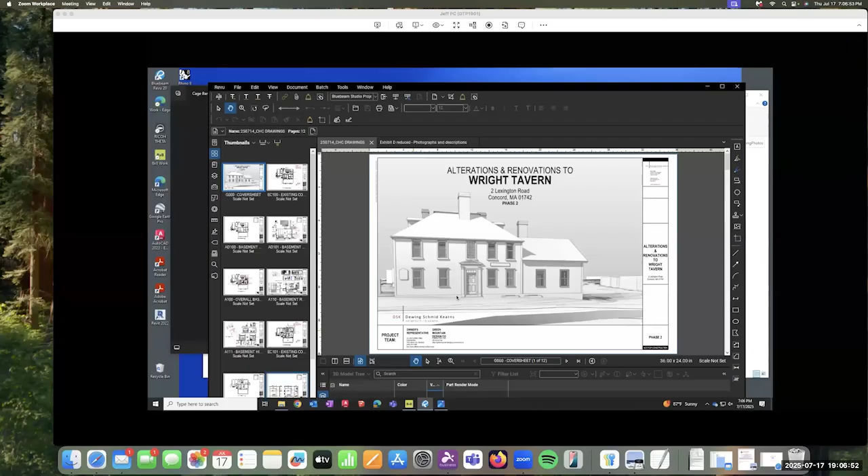Okay. Do I have permission to share my screen? Perfect, you do for me. And do you need to give him permission? No, you should be all set. Okay, yeah, cool, there we go. Okay great, awesome. Are you guys seeing this wonderful image of the Wright Tavern? Yep. Is it large enough for everybody to see? Should I zoom in? If you can make it full screen, I think that would be great. Maximize that window. That's, I can close this. Close the thumbnails. Is that better?

Not great. I think you can make it bigger. Can't he make it bigger? Instead of sharing your whole desktop, you could just share that application. How do I do that?

Stop sharing, and then when you go back to share, you'll see some options. One's a desktop, one's just the application, or if it's like a browser, you can open a specific tab. I see screens, documents, advanced. Documents, documents, it's alright. That's not showing me what I want to show you guys. You don't see applications or anything like that? I don't see applications here. I can scroll in and out, zoom in windows as we go through this. Oh, like in the middle, if you have screens, yep, if you have application windows.

Jeff, I think Bluebeam also has the presentation mode, look for it. Window, see if window... you know what, that's fine, for the sake of time that's fine.

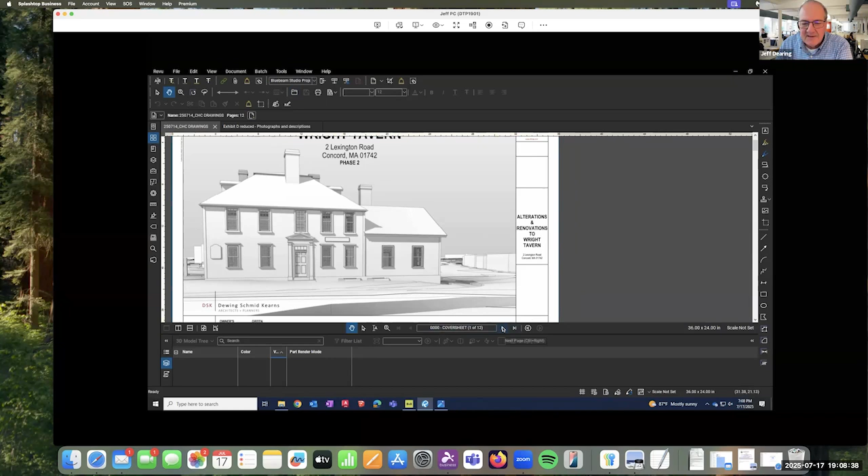Okay, so right there is the Lexington Road view perspective, and we're going to start down on the basement level. And just to orient everybody with the plan, the top side of the page is Lexington Road, the left side is Main Street.

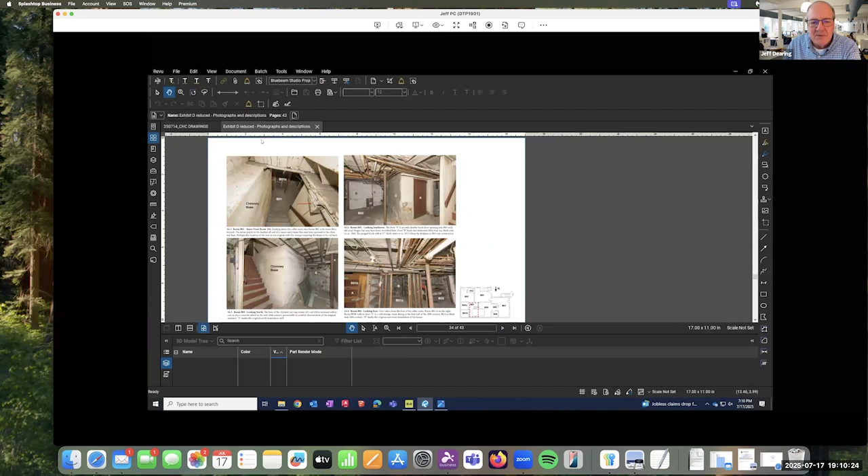What you're seeing, this is the door to the ice room. This is that partial partition with the metal mesh. Okay, and so this is where we're proposing to create a new space. And B2 is just, there was no names on the preservation document, but this is a storage area. And what you're seeing here with the door is the old bathroom that was here.

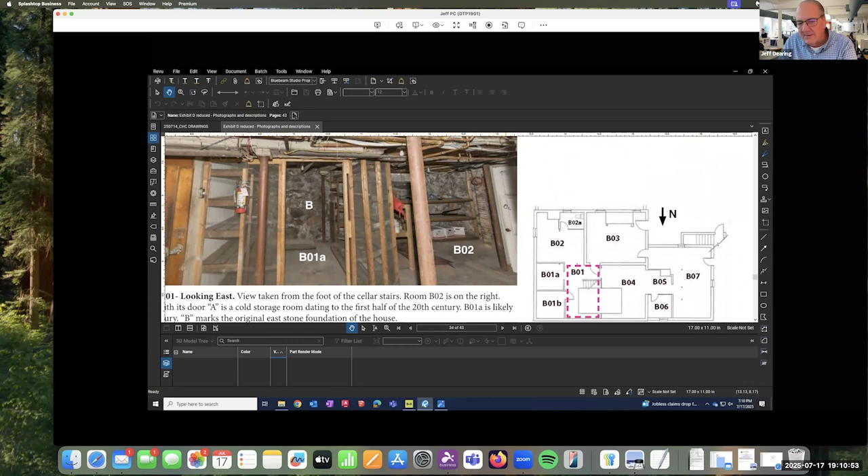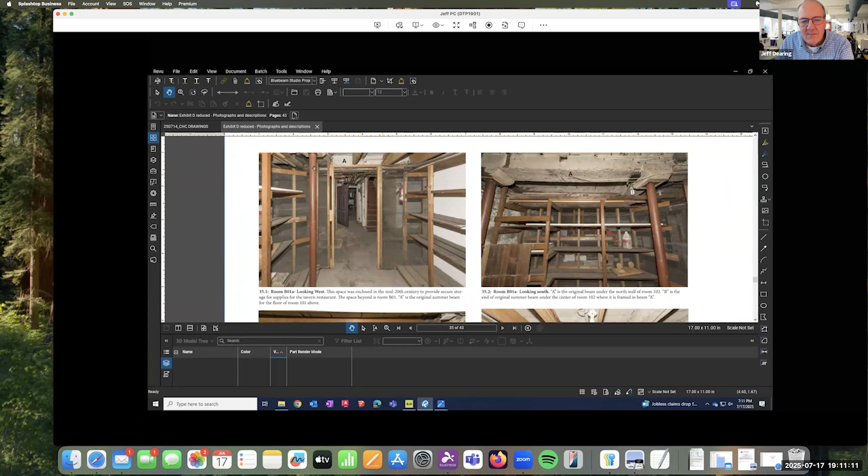This is a larger expanded view of... well, let me just. This is the interior of that secured storage area with the wire mesh and the wood. I believe this partition no longer exists, but the others on the left side do. And you can see it's just basic storage, timber structure with wood boards for shelving.

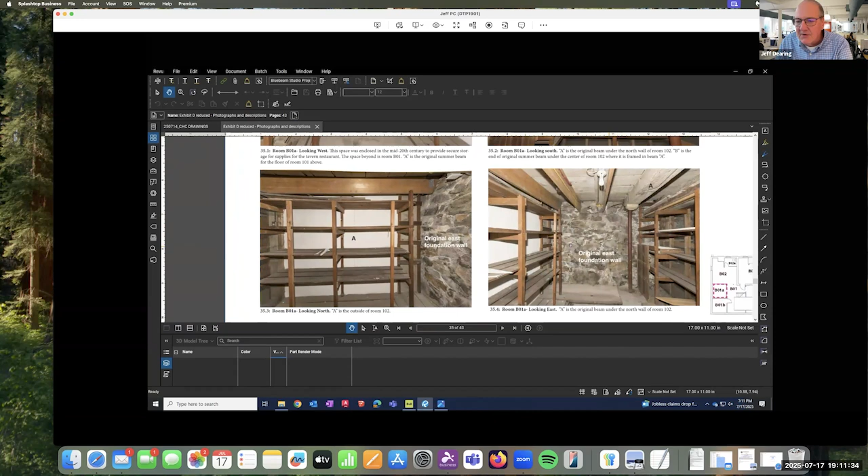And here's the opposite wall, and this is the back wall of that cold storage area. And then here's a good view looking directly in at that space toward the east. And the original stone foundation, one of the primary posts or support beams, that is original, and you can see the original decking above that.

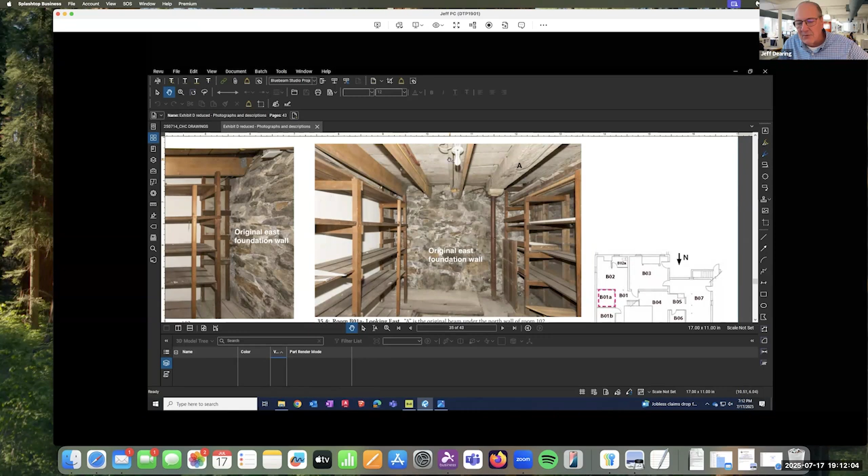What I'd also like to point out here is you can see one of the original joists here, and they have been sistered, is what it's called, where they apply a new structural member to give strength to that member that was not adequately supporting the floor. And so these have all been altered other than the primary beam.

This is that cold storage room. So again, you can see everything has already been lined. There are again some open shelves in here. Those will go.

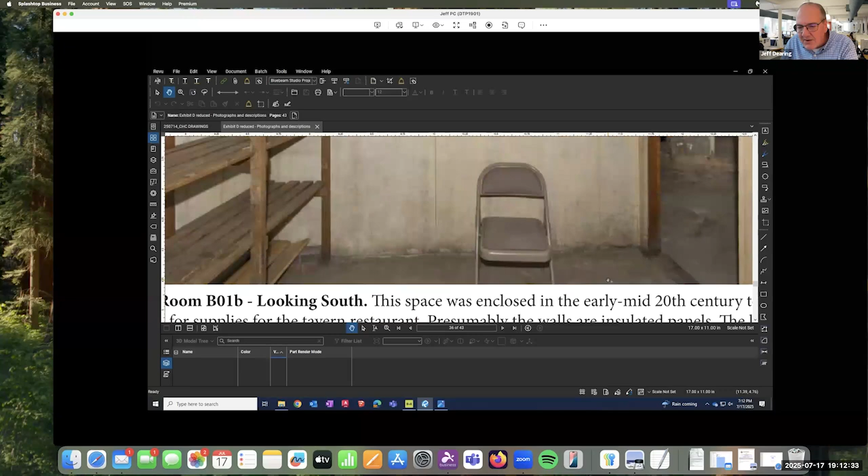And here's the corridor leading to that door. Then we're in a space with the door to your right. You can see the floor has infill on it, and all 4 walls already have a surface applied. We will be applying a ceiling above this so that anything above is isolated.

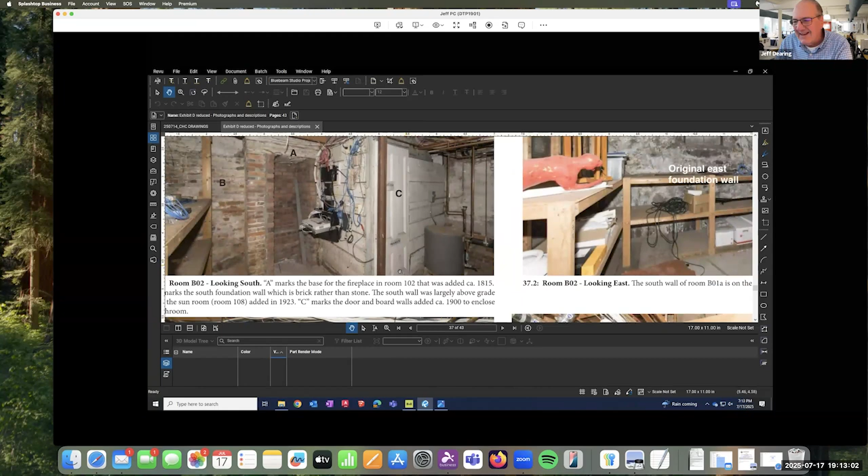Now we're going to get into the B2 and B2A. This is that bathroom, the B2A space. You can see it's horizontal boards, it's a door. It's also a raised floor, which you can't see. It's a wooden floor that's raised up about 5, maybe 6 inches.

And then here's our east exterior foundation wall. Again, you can see almost all of this structure has been sistered, so it's all been altered to some extent at this point. This is before the structural renovations. This was a parged brick. You can see a little bit of the brick here, and the wood post coming through. This has been removed for the most part and infilled with CMU.

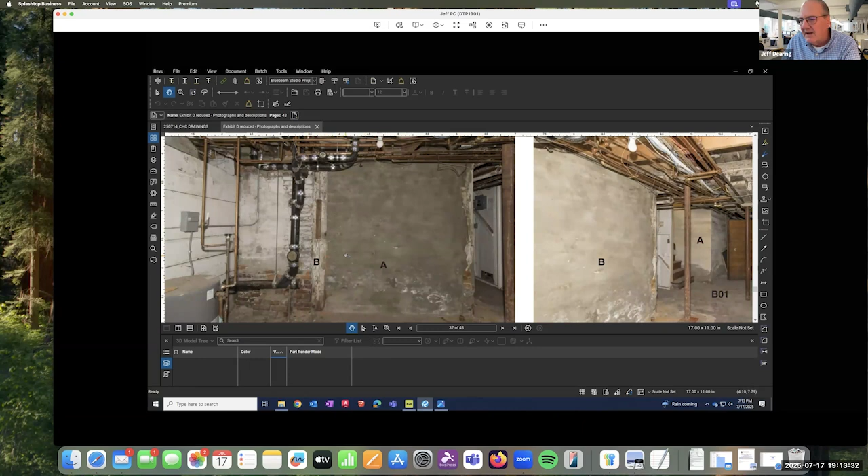The wood beams are still in place. They worked around the beams, so the original wood beams are still in place. And what's not real easy to see in these photos is the new lally columns or structural steel posts. There's a half dozen in this area.

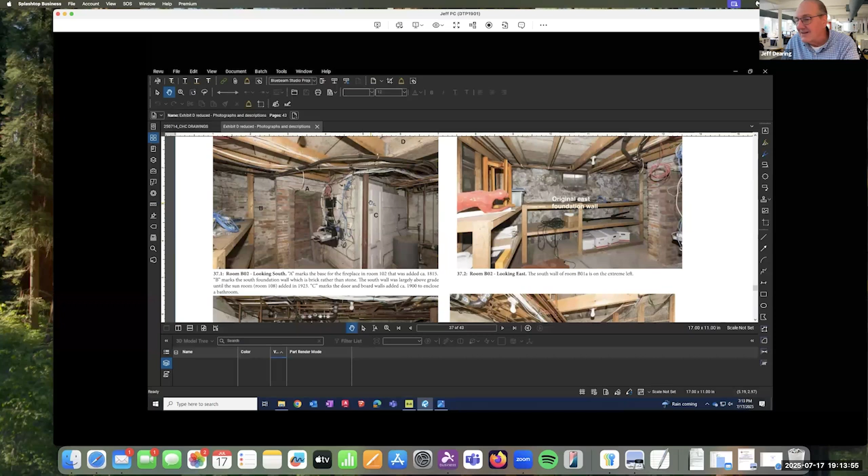So there's a background of reference, and now I'll walk you through what we're proposing for here. This is just a quick overview of everything, and we're showing the demo. This gets into the detail of that demo. Anything in these dashed red lines is what we're proposing to demolish.

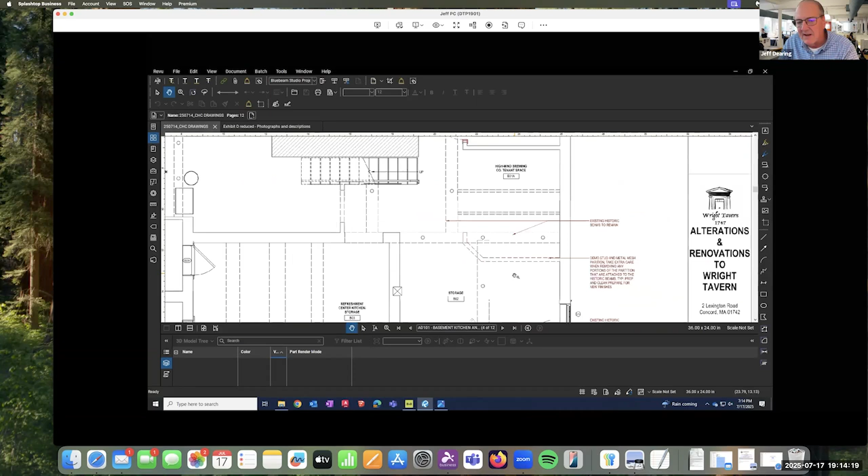This is that half wall or the partial wall with the wire mesh. This is that existing bathroom and floor. And though it isn't listed as historical, we're actually going the extra mile to be cautious about it and asking for that to be carefully disassembled and stored, just in case it could become useful at some other point, whether it's this project or somewhere else, because of the age of that wood.

And then in the existing B03 space, the former kitchen or bakery, there's extensive renovation work here. These beams were all reinforced. There's nothing to be demoed here other than there is a bench, it's casework. We're looking to remove that because we need to get in a grease trap. In order to do that, what we're looking to do is create an opening in this masonry wall to provide access for servicing that unit.

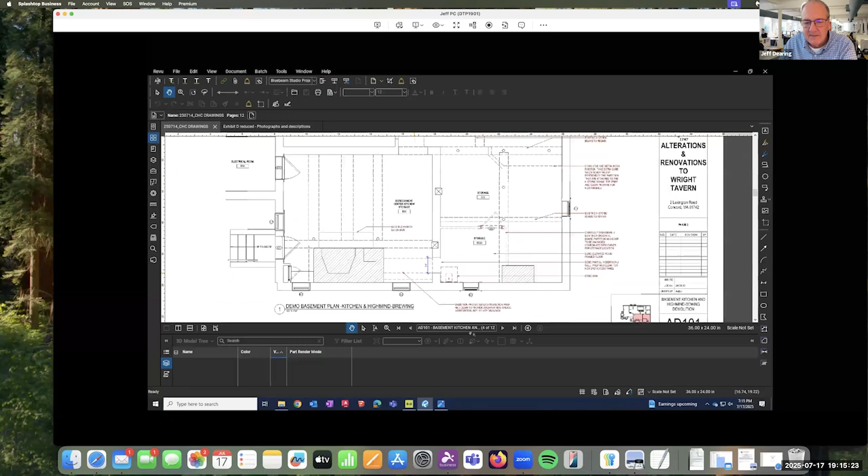And please stop me if you guys have questions along the way before I get too far along.

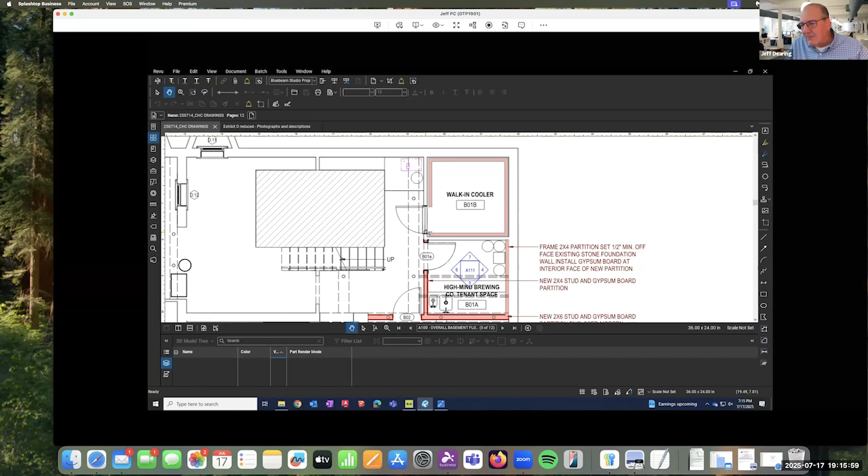Our proposed plan, starting in this upper corner, is we'd like to put in a modern walk-in cooler. These are prefabricated, custom-made to your space, modular sections. I can't remember whether it's a Z shape or a U shape that lock together, but they do floor, wall, and ceiling panels, with their own door. So we are looking to remove that existing door that's there, and again, out of caution and for the beauty of that door, we would ask for it to be carefully removed and stored.

You may want to chat with JC briefly about this, but we are looking to create a space for a microbrew here in support of the beverage center and the use of the tavern by its nature. What we're proposing is a traditional wood stud wall, 2x4 here, 2x4 there. The 2x4 against the existing foundation, we would hold off of that foundation so it doesn't actually touch it. This will wind up being a 2x6 wall because of the new steel columns that have been put in place, and to get around that with the wall, we need a 2x6 wall.

So we've got a new door, and this storage space would continue that same use, and we'd actually create a closed, secure storage area where the old bathroom was. That's just a simple reconstruction of those walls in place.

And the former bakery becomes a support for the refreshment center. There will be no food production down here. This is cleanup and support for what we need to do for the refreshment center on the first floor.

Again, in terms of preservation, we're looking at adding a new wall face here, held off the masonry by a 1/4 inch to a 1/2 inch minimum. Couple reasons for this: one, Board of Health is going to require us to close up that fireplace opening, and same with the baker's oven, but they will be preserved. We would hold that off that distance and then sheathe it, and do a backer rod and caulk at that final connection to seal the joint for insects, mice, etc.

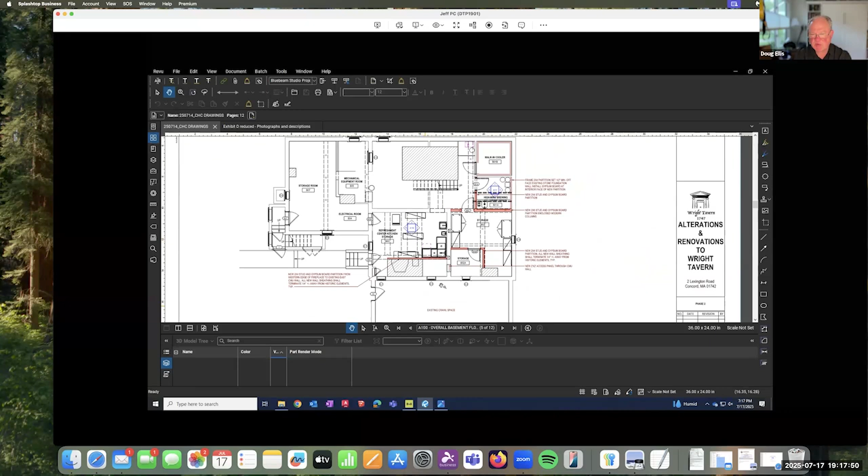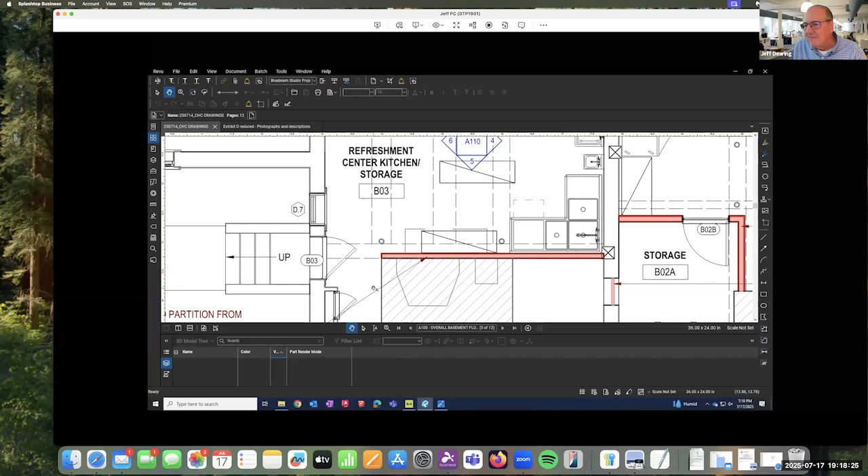When you mean you're sealing it off, but you're preserving it, does that mean you're drywalling over the whole thing? On two faces, right? The room side face and this very end, and potentially on this inside face where we're looking to add the grease trap. Yeah, and then there'd be about a 1/4 inch gap from the end of that wall to the face of the masonry. We would simply use what's called a backer rod—it's like a foam round rod that they stick in, and it provides a backer for caulk, so the caulk has a place to stop and expand properly and attach to its left and right sides. So the only physical contact here is the caulk. Okay, but the structure won't be visible any longer. No, it will be covered.

I think, no, I've got 3Ds and everything. All right, here we get a little fun.

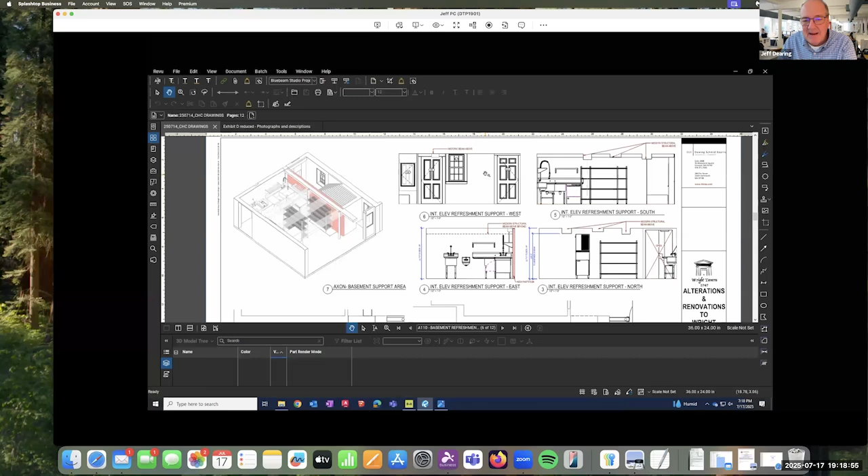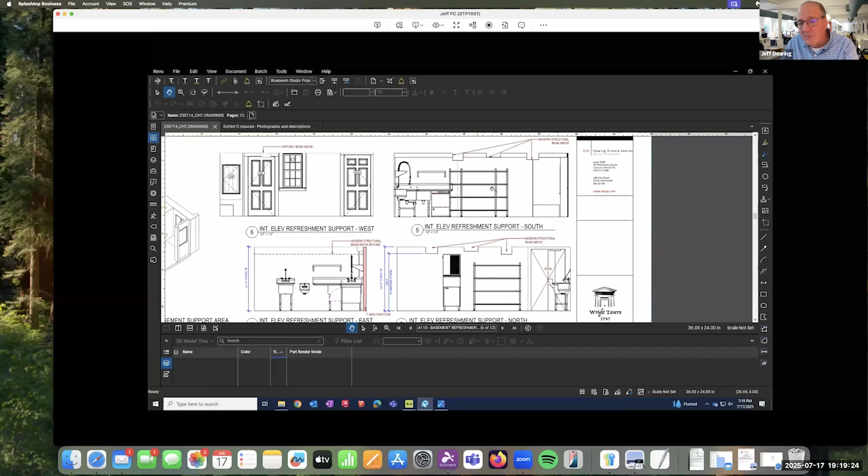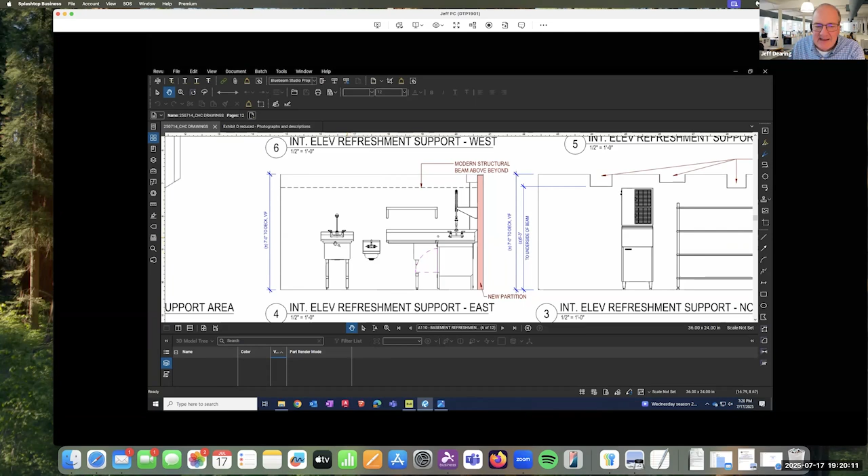Continuing on, we're now looking to the east, toward that storage side. Here again is that second portion of the L of that 3-bay sink. This is the CMU wall—we may have to paint or seal it for Board of Health. I'll let you know, we have not been to Board of Health yet. We've been trying to get this tightened up with our MEP engineers to make sure we had enough documented to accurately show it to you folks, and then we'll meet with Board of Health. But then we have a hand sink and a janitor's mop sink here. Then the wall now to the north looking to Lexington Road, there's an ice maker here, freestanding or rolling shelves, and this is the opening from this room out to that corridor.

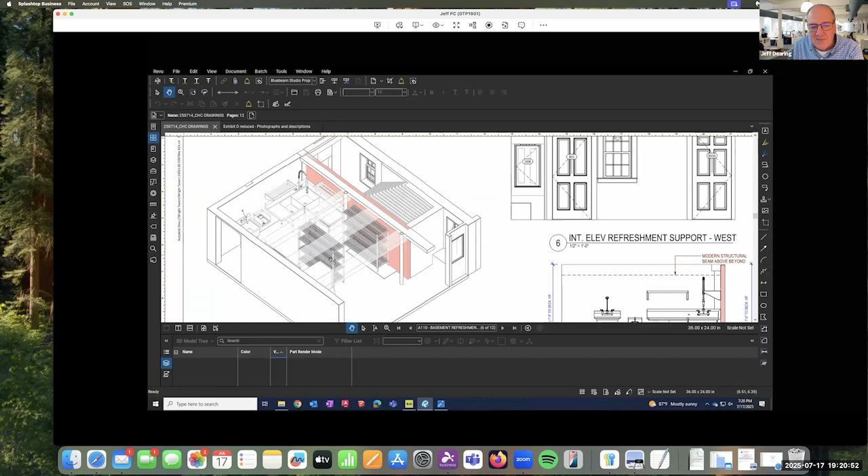And then a little isometric of that, to give you a sense of understanding that space instead of flat elevations. This is that beautiful masonry of that chimney that we're no longer going to see, but it's going to be preserved. Here's that L-shaped 3-bay sink and the other sinks, and then these little racks for storage, and these are the movable storage racks and the ice maker.

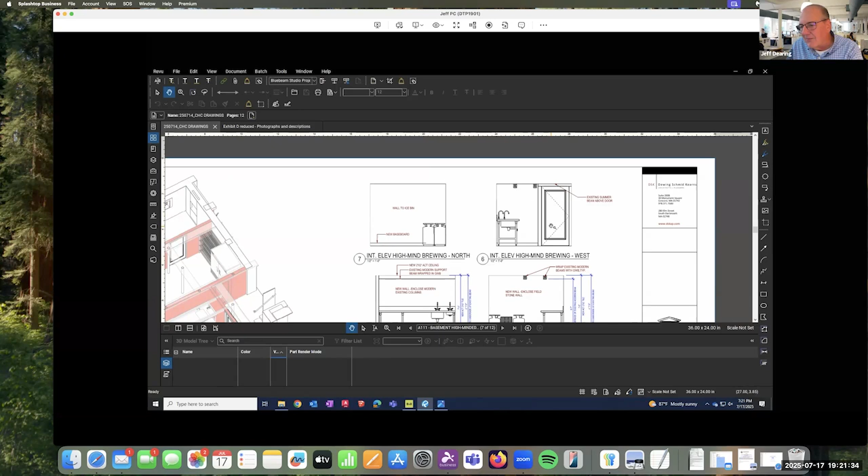On our next sheet, now we're moving in toward the maker space, the High-Minded Brewing area. It's a very simple room. The north wall that abuts the ice is just going to get finished with wallboard and whatever is required by Board of Health—some equipment gets stored there. This is the new wall looking to the west, our means of entrance and exit from this little room, and we're envisioning this being a glass panel just to borrow light and not have this space feel so closed.

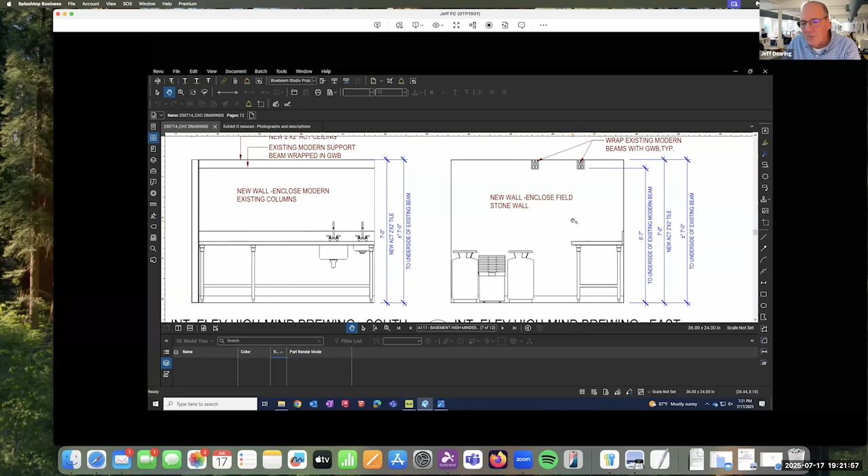Then on our south wall, again looking now toward the tea room, this is where most of the equipment is—stainless steel work surface and sinks. And then on the east wall, this is that wall that sits in front of the stone wall. We would have the wall in there, and then we would have equipment along that, and to give you a sense of what that looks like.

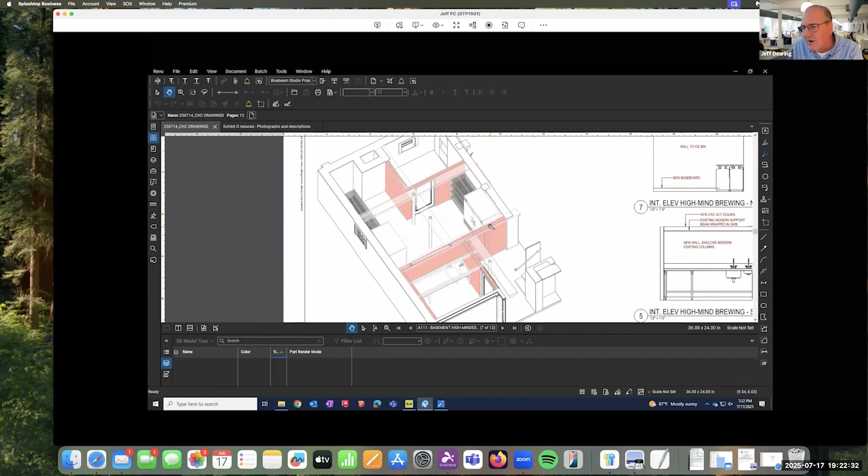So this doesn't quite support the High-Mind Brewing stuff, this is more about that storage area. This is the new walls for where the bathroom was, this is that storage area, this is the wall along one of the main beams with the new structural support columns, and this is the entrance to the High-Mind Brewing and the work table there.

And these are just floor plans that kind of support what I've already walked you through. And that's what I have for the basement. Do we want to tackle questions, or do we want to continue on and then hit questions?

Say continue on. Okay, so our first floor plan, again, Lexington Road is to the top of the page, Main Street is to the left of the page, and we're using the same graphics to represent the preservation document, the orange being considered modern walls and anything in teal being considered significant and or original.

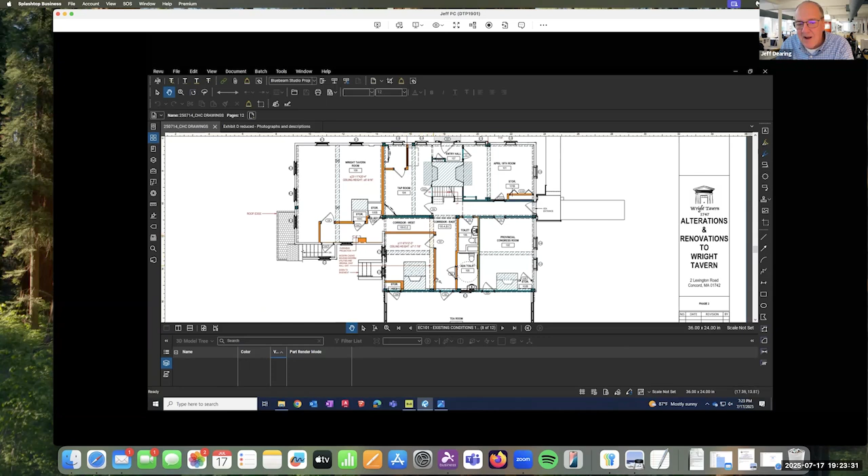And just to orient us, this is the space we are mostly going to be talking about. So you can see here, modern wall, modern wall. There's a modern intervention over this beam, and we have a modern wall to create the closet that services the tea room.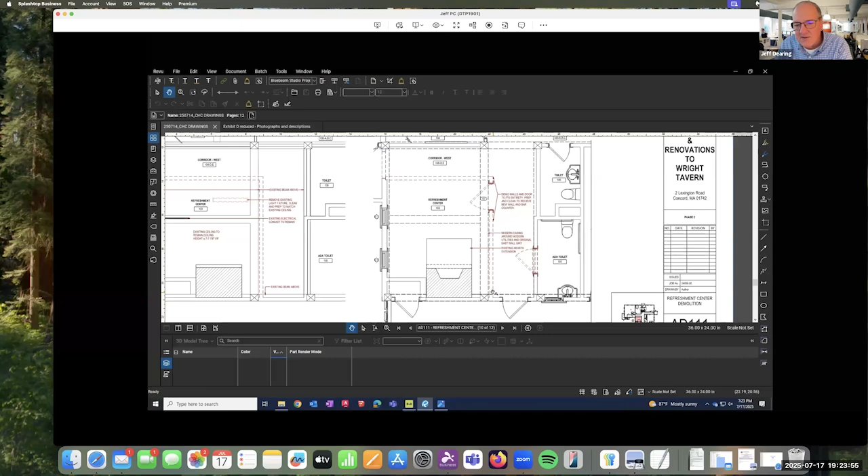I'm just going to move to the more detailed demo plan here. So in terms of demolition, our plan is to demo all of the modern walls, and potentially change out this door if we can make it work with ADA to have it swing into the room instead of into the corridor. That's also a modern door.

So in terms of what we're proposing, new partition really is limited to this closet and this little wing wall. Everything else that we're proposing really is casework or millwork.

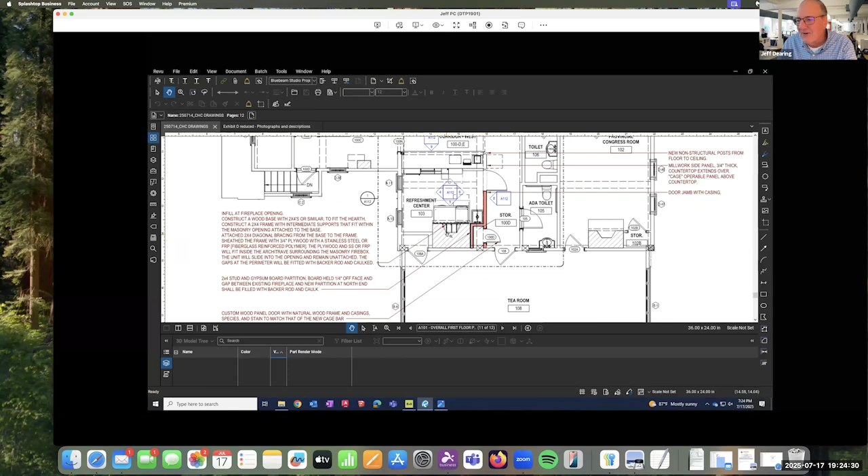We also have to address the firebox, and we're trying to be creative with that as well. We don't want to attach anything in here. That's original firebox, that's original hearth.

Our goal is to create a very simple framework, a floor plate network that follows the profile of that firebox, a vertical stud that infills that fireplace opening, and then some sloped bracing back to give it support. But the weight of this alone, we think we can just slide into place and it will be stable.

And then over the studs, we'd run a layer of plywood and then a finish material, whether that's stainless steel or an FRP, still to be determined as we work through our finishes with Board of Health.

We also have a power requirement in this location, since the manufacturer's cord on the unit is only a certain length, and they don't allow extension cords on it. So we have to get something here.

Our thought is to come out of this wall with electrical metal conduit, come out and across the face at around just 32 to 34 inches, so it's hidden really by the equipment. Nothing would be attached to the masonry.

We would then turn into this fabricated structure, add an electric box that is flush at the right height that they can then plug that unit into.

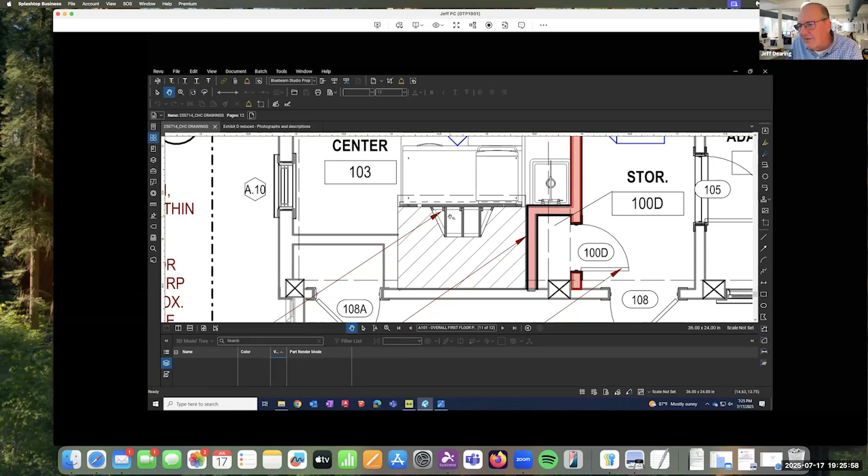Jeff, one thing just to point out: what we're covering up is only the firebox. The cabinet that is above the firebox and the mantle that's there now will remain and will be open. Correct, and you'll see that in one of the images we have in the drawings.

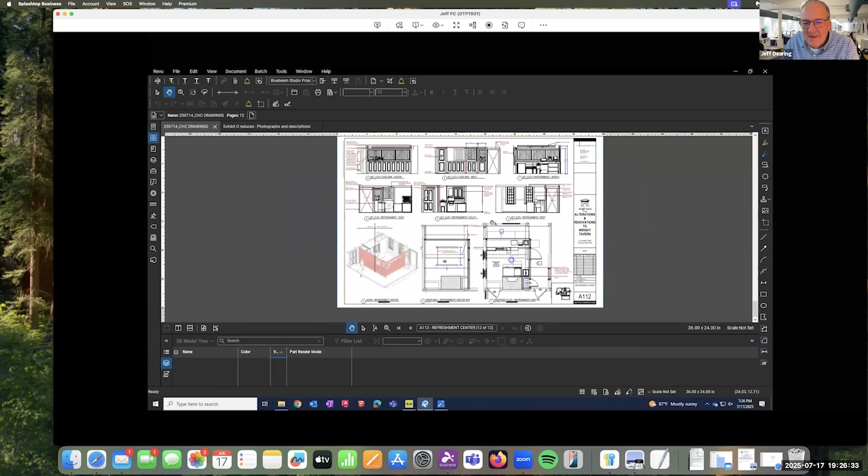Yep, so here we go, here are the fun drawings. Actually, I'm going to orient us first a little bit here. So what you're going to see on these first two images are the outside views from the hallway or corridors, looking back at this proposed refreshment center. This first one's taken in this corridor on the north side, looking south. The other one's taken on the east corridor, looking west.

So the concept is a cage bar. And the other concept is that this would all be made from reclaimed wood of an appropriate species. We're thinking pine, but we would try to match, and we'd use the tap room as a source for matching those species. This would be distressed, not premium wood. And the goal of this is not so much the aesthetic, but there's a real requirement here.

This space will now be used for more than just the tavern. There are tenants in the space, tours going on, visitors coming here, and we need to be able to close this and have some security to it. But we also need it to be able to be really opened up for service. So that's the reason for utilizing the cage bar.

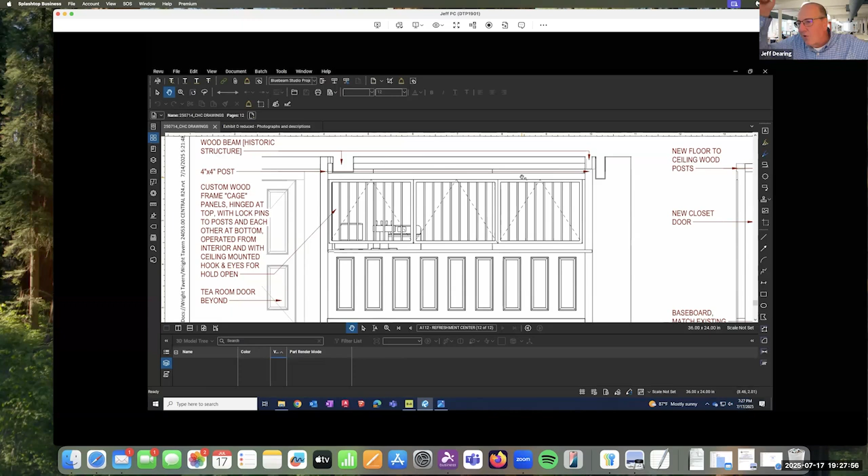On this wall, we're looking at three panels, and they would hinge along the top, using a simple hook and eye to hold them in place while open for operation. Here's a quick photo reference of that. If you haven't seen it yet, this is the little cage bar that was constructed for the April 19th ceremonies. You can see that cage in the open position.

Another interesting feature here to focus on is this door. It's a Dutch style door. So again, that cage can open and the door remains shut while service is happening. We're looking to utilize all of those examples.

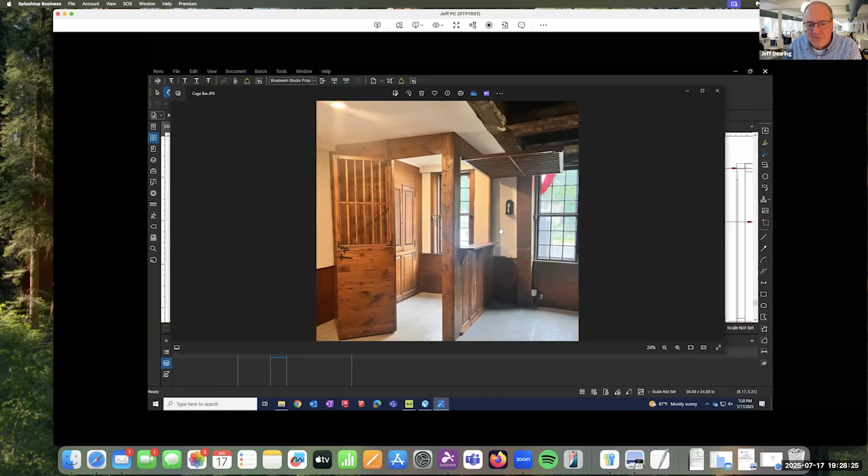And then it's all wood panels here. The language of those panels, the dimensions, will be derived from the dimensions we find in the tap room, so we have consistency of that language.

Now here is our west wall. This is the corridor heading down to the tea room, with the tea room here on your left. This is the new door for our little storage closet. We've done a paneled wood wainscot, and then this is just a continuous jamb that our door is attached to. These are freestanding wood posts, and then all the casework for the bar.

You can see our hinge marks here. This would open up. We've got the Dutch style door where it either opens all at once, or we can open just the top, which lets you operate the bottom door with good visibility.

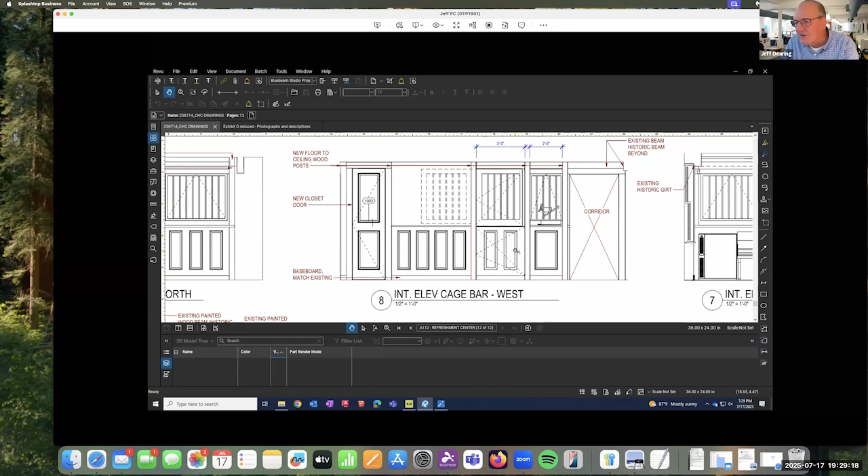Now we're going to move to the interior of that cage bar. Here we are in the operator zone looking out at the customers in that corridor on the north side. You're seeing all the equipment below, as well as what you'd see on the countertop: our taps, our point of sale machine, and I think this is a display for food.

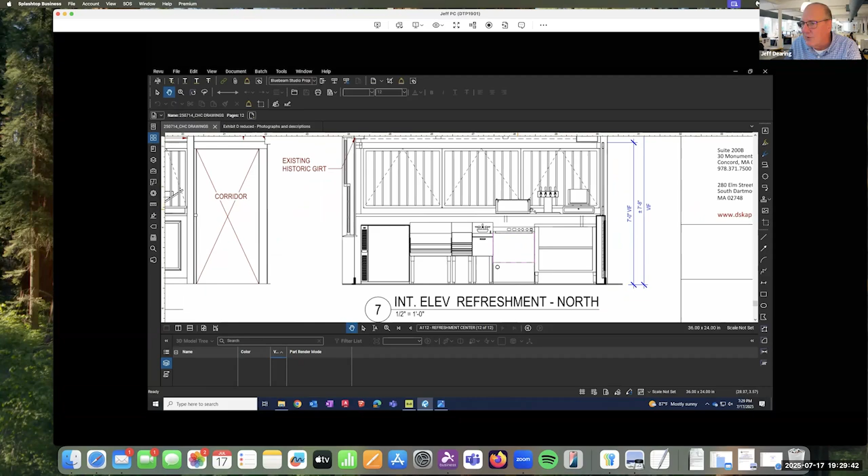The next image is now turning and looking back toward that corridor that leads to the tea room. It's somewhat of a section cut through here, and you can see we've got a wood structure here that we can hinge, which would free span across. It may need to be supported, but this is in the area where we're demoing a wall and would utilize spots that already had attachment points for attaching and supporting this.

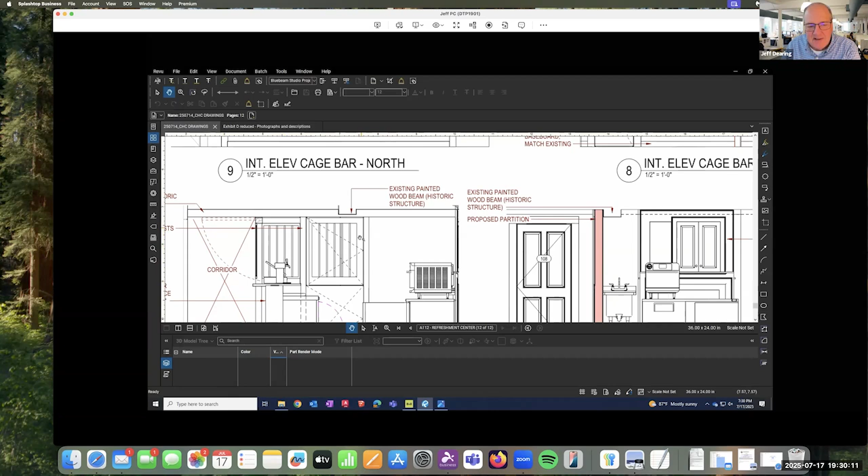That would hinge up. You're seeing that Dutch door again from the inside, and then kind of a profile of the bar and the equipment. On the opposite side, you're seeing some of that equipment we talked about that needed the cord for power.

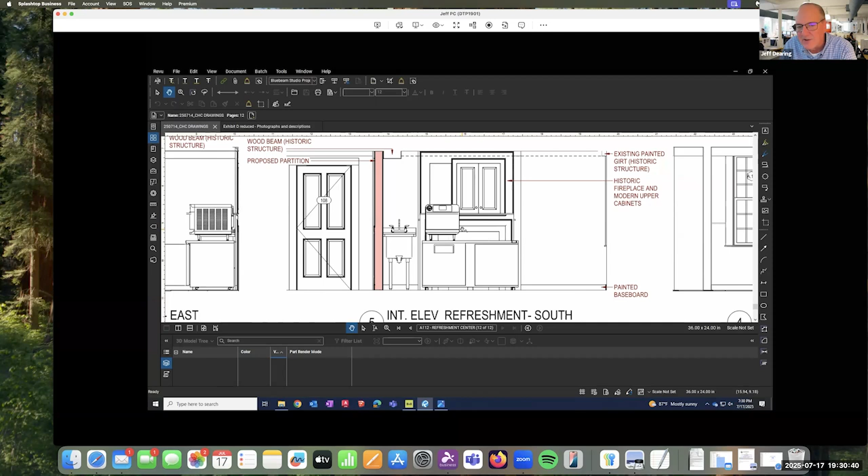This talks to Tom's point he just made about that existing fireplace. So that's what you're seeing here, the existing fireplace. This is the infill panel, but this is the architrave around it that's fully preserved and untouched. There's a mix of what is original and what has been modified in this space. The goal is to leave it alone, let it be. It is what it is, and it's a nice presentation in this use.

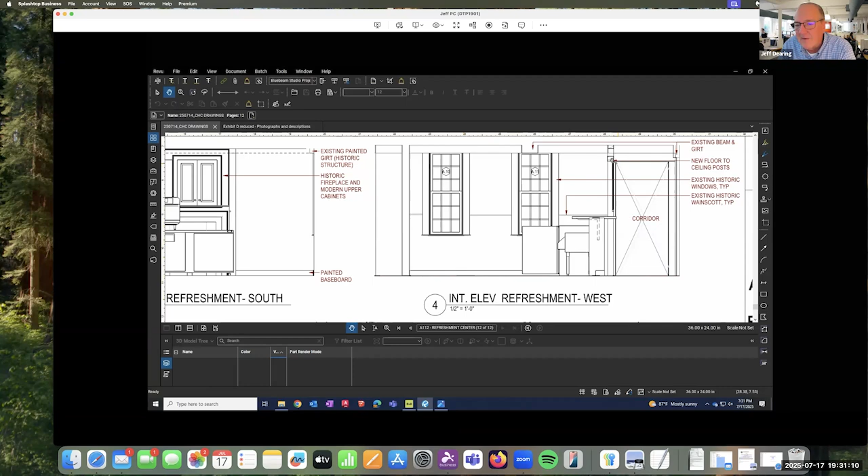Now here we are looking at the exterior wall toward Main Street, the existing windows. There is a wood wainscot here; we will not be touching that. We have another freestanding post against the wall where that modern partition is. All of this will die into that and support it.

And I think what I forgot to take you through is the preservation documents, so let me go back to that.

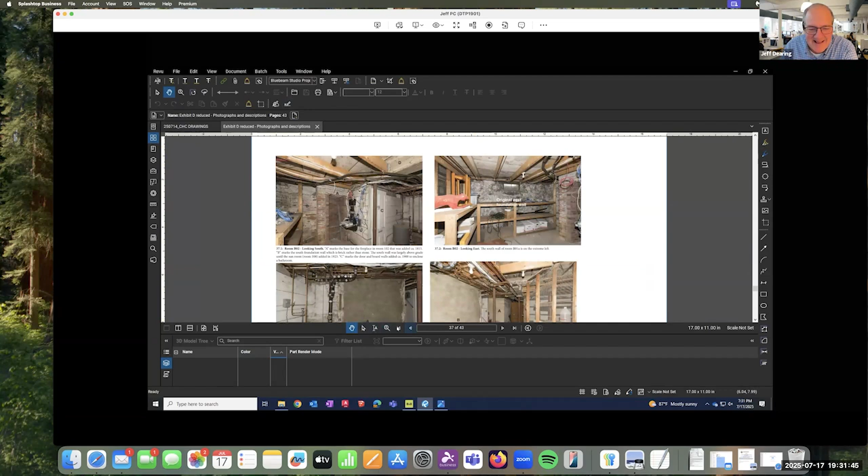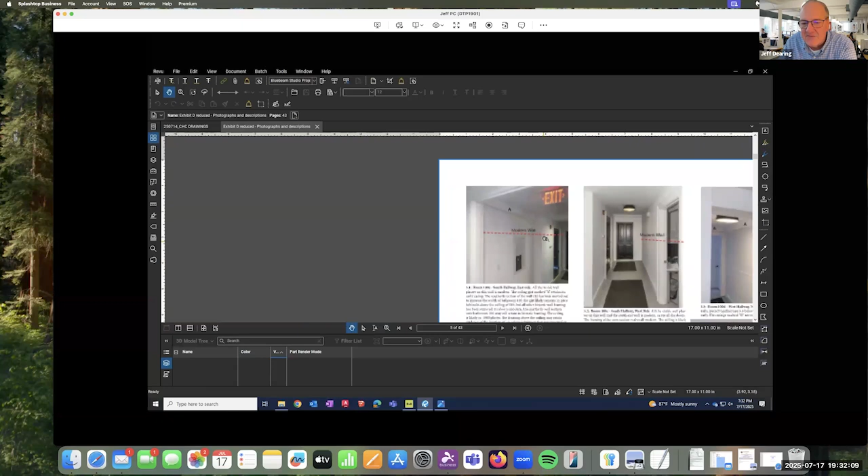Okay, these are really challenging to read until you orient yourself. What we're looking at is A100C, the hallway that leads to the tea room, and 100D leads to the L. As we go through that, this very first one is in that first corridor that leads to the tea room. That is the tea room door down at the end, and this is that bathroom door.

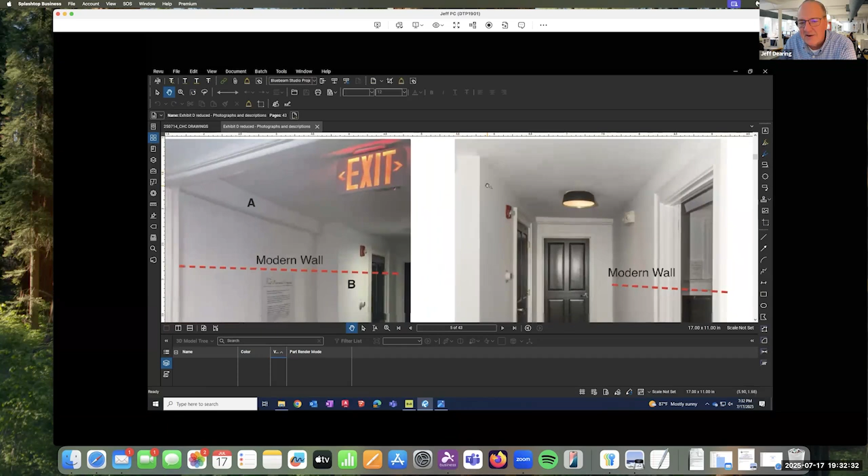There is a shift in the wall here, and you do see one of the original girts coming through. This is a straight-on shot where you still see that door. What you can't see is it was taken right at the face of that notch. You can just get a little sense of that girt coming in here for reference. And then this is the door to the current 103 space.

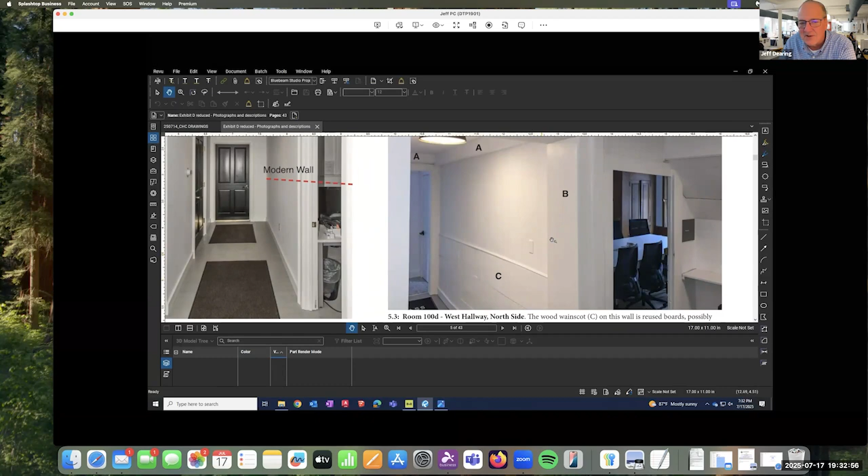This area is the actual opening of that corridor to the L. There's existing casing here as well as the beams that tie in at that location. This will not be touched.

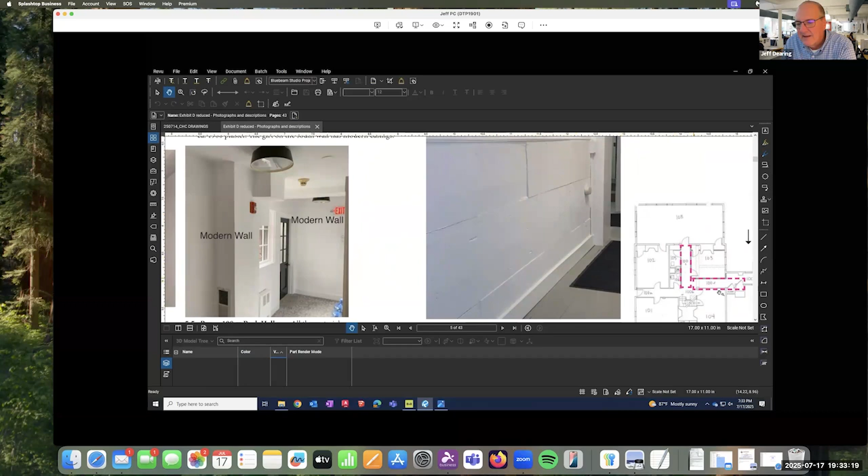And the last one is looking back again at that north side, this wall of that hallway, and you can see how pieced the wainscoting is.

That's our presentation. We look forward to your comments, questions.

I think this helps me understanding about 75%, just getting my orientation on north, south, east, west, which, a lot. Getting the three-dimensional perspective is challenging.

I think you mentioned there would be ideally a walking tour of this with the commission. We would be happy to do that with the drawings so that you can have them in your hands and orient yourself in those spaces, and we do a Q&A as we go through.

Lauren, I see your hand is raised. Yes, thank you, and thank you for this great presentation. I just love this project and I'm so grateful for all the care and great work that your team is doing. So, thank you for that.

I have two questions. One relates to the covering on the chimney in the basement. Is there any concern about mitigating moisture down there, or do you think that's going to be not an issue?

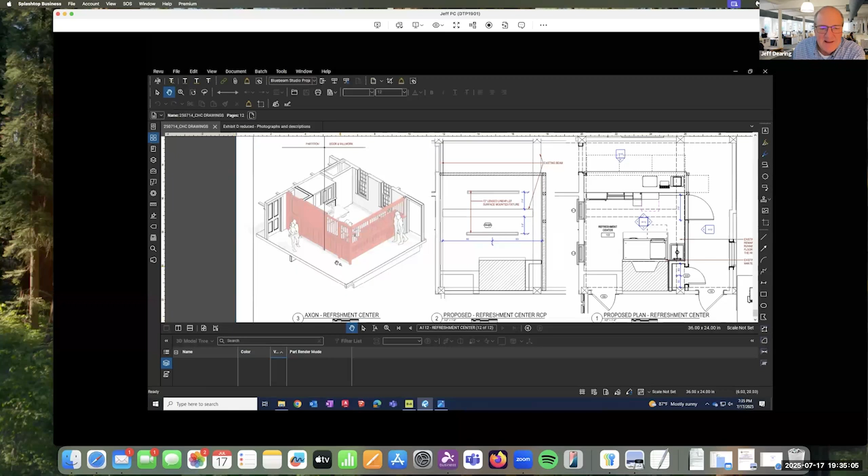I think it is what it is. That chimney has its board form concrete around it. I don't know exactly when that was done. Tom, was that work done with the structural renovations or prior to? The original chimney base in the basement. Yeah, it was done before the structural work, probably maybe 30 to 50 years ago. Hard to know exactly.

That would make sense with that kind of construction. In terms of water intrusion, we don't want to seal that stone. If we did anything, it would be at the perimeter at the foundation slab to manage the water and not try to seal it. I totally get that. Okay, thank you.

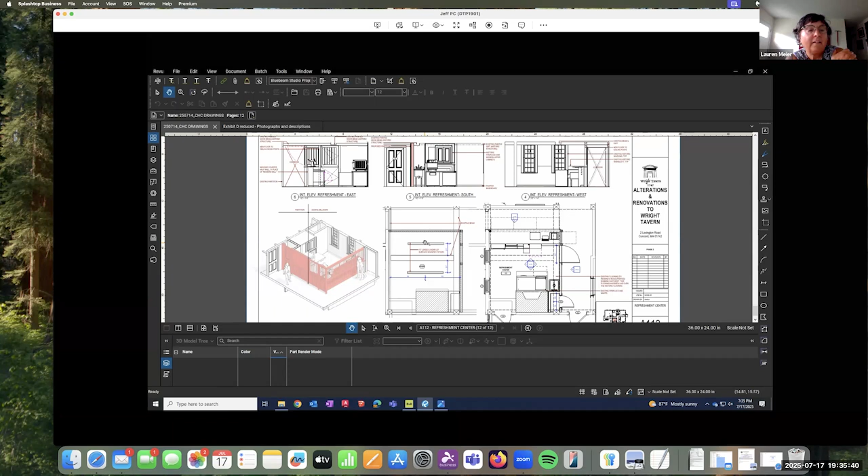Then my next question is a little bit more challenging, and it relates to the design of the panels and the cage that you just talked about. One of the things in preservation, the Secretary of the Interior standards, do talk about new work being compatible but distinguishable. And this is beautiful—it's going to look beautiful with the other historic features, but it does give me pause. It's a challenge because you want it to look all part of a single thing, but on the other hand, from a preservation point of view, it needs to read as a modern intervention.

I don't, I hadn't thought about that question, and it's a great question. Thank you for that. It's definitely something for us to consider.

How would the board feel if we kind of kept the aesthetic, but this was a painted versus natural wood? Would that get to your concerns?

For me personally, I think that's the kind of thing you might think about, which is making it distinguishable from the original in some way. Oftentimes it's the same design, but it's a change in materials, something so that it fits. But I'd pitch it to my other commissioners, but I just thought I'd raise that issue relative to the Secretary standards.

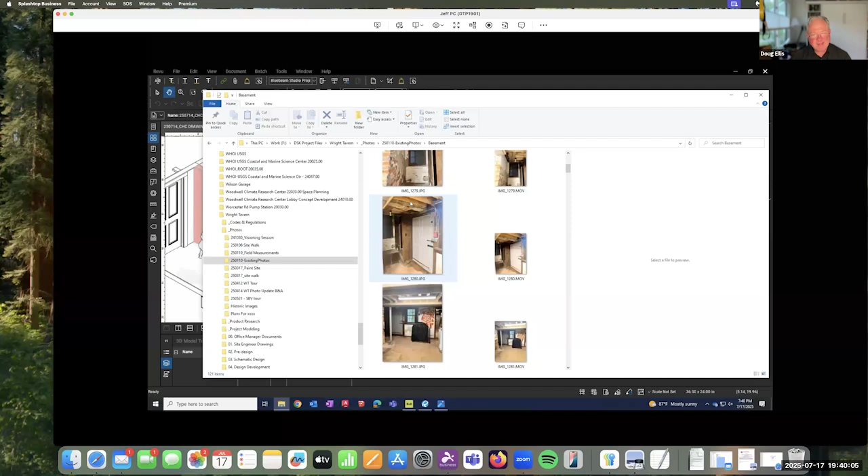I have another question - but the fireplace in the basement, hasn't it been painted? Yes. Would you like to see an image of that? It's a beautiful room, and the artwork remains - I think it's from the First Parish. So would you be removing that?

We wouldn't touch it. We would simply put this wall in front of it and leave it as is. Our concern with trying to remove paint off old brick like that is that we would do more damage than good. It's apropos of another building going on in town.

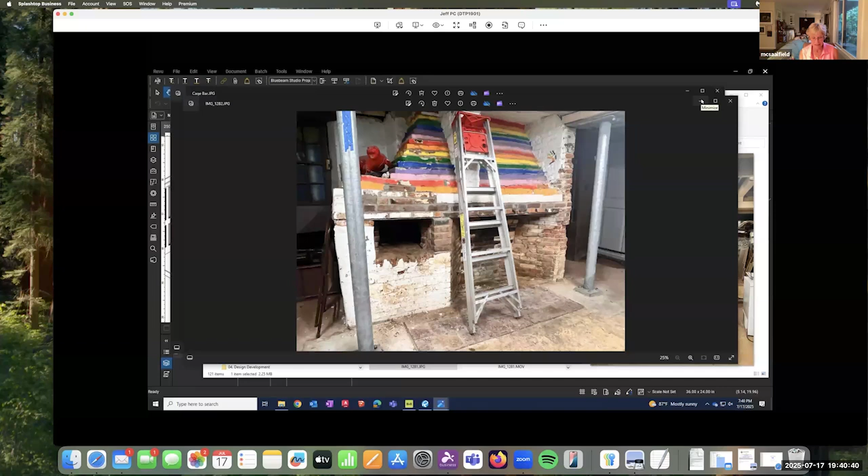At any rate, the things about plumbing and electrical upgrades, I would probably defer to you and Lauren, but will that be too disruptive to upgrade service and plumbing to support this new refreshment center? We went through a ton of gymnastics with our MEP engineer to accomplish their needs to do this while being respectful of the structure.

They came up with something completely different. We're like, nope, can't do that. We walked them through it, and we had a full hour plus meeting just identifying what our options were. And they did a full redesign. That's part of the reason you got a late submission with the revisions - we had gone through that exercise, so what we're showing you, we're pretty confident we can do, and that'll meet the health department's standards.

That was one of the critical things - we're trying to find that famous knothole between what the health department needs and preserving what's there, while also being functional so it will support what we're trying to do with the space itself.

Another question, Tom - what are you thinking for hours of operation? It's a great question. So what we're thinking is to have it be a museum, I'll say from 10 or 11 in the morning till, let's say 4 o'clock. That would be, you come in, you pay $10, you come in, you walk around.

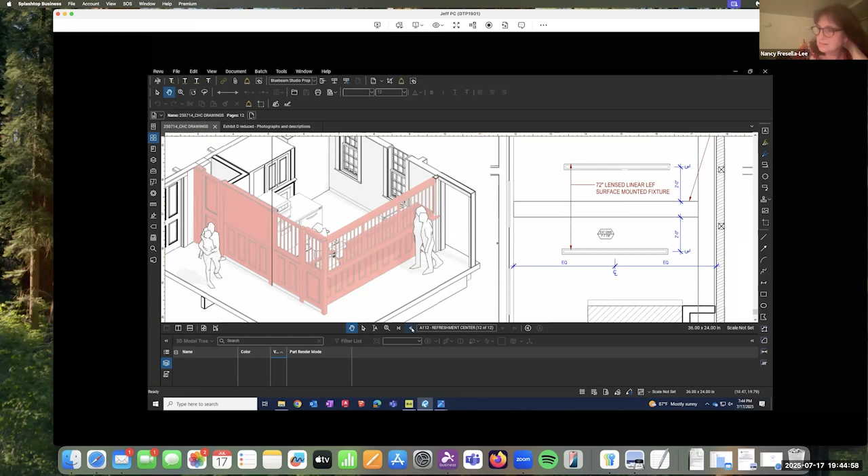Yeah, you showed where the microbrewery was going to be in the basement. Just a basic question — that's to hold the beer that's going to be pumped upstairs, right? That's to produce it — you're going to make beer there. We're gonna brew it. You're going to brew it. Okay, that's a surprise to me. Who's going to do that?

Is JC still on the line and can talk about his concept? Hi, I just want to say it's been an honor to be a part of this project for a little bit over a year, and to see the changes we've made. I give tours here while I'm waiting for the brewery to get started.

And everybody, when I tell them we're going to be able to drink here just like these famous people who started this country, they get chills. They're like, I can't believe I'm standing in the same exact place where these people drank — it just blows their minds. I'm very fortunate and privileged to be in front of you all.

So this is a very small operation. The tanks themselves are about 6 or 7 gallons for producing, and then the fermenters that turn it into alcohol, into the beer, those are 7 each. It's going to produce about 6 gallons a run, and it takes about 2 weeks. So, yeah, a very small operation — it's a novelty, it really is.

Yeah, it is. So this is to get my license, and the mass production would be at an off-site brewery — a contract brew, that's what it's called. My operation would produce about 30 bottles — they call them bomber bottles, like what Maine Brewing does. So about 30 of them, and they'd be special one-offs that would be purchased, more of a commemorative thing.

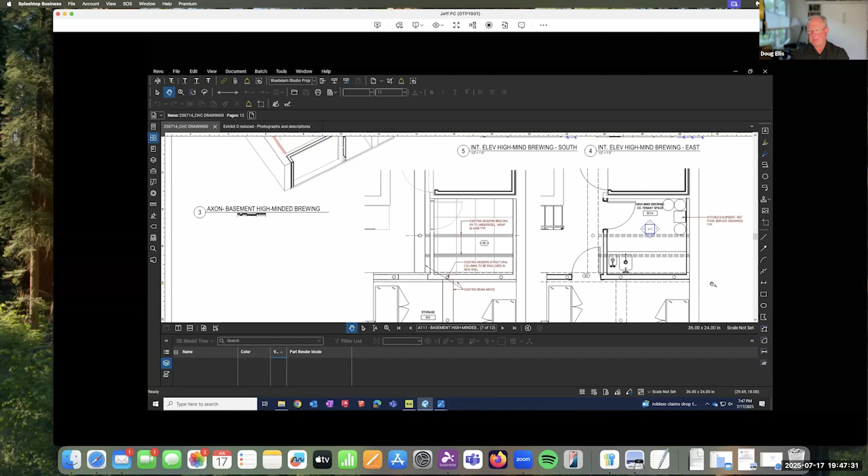JC, maybe mention what type of recipes you're using and how they relate to the history here. Yeah, so I've been a teacher for 20 years, and up until this last year, I was a teacher at the Concord Children's Center for 20 years. I thought something was missing in Concord — honoring the more famous people of Concord, and a brewery in this part of town is missing. So I did a lot of research and came up with period style beers.

So I have 6 beers already, one's named after Sam Prescott, one's named after the women of April 19th. I have a Wright Tavern Brown Ale.

These are all based on ingredients that would have originally been available. They're recipes that I've created with a guy I'm brewing with, not historically exact, but the elements are there. So what you would have had, you'd have been able to get maple and molasses for my maple molasses brown ale. And the hop that is centerpiece in these beers would be similar to what would have been used back then.

But if you were going straight out and making it like George Washington's beer, you'd throw it all together, throw a blanket on it for 2 weeks, and then come back and get it. Usually what happened is they would be all sour. So I'm doing something for the palate here, but also trying to relate Concord's heroes, and heroes that maybe you haven't heard of, displaying them for people to gain a better knowledge of what Concord has to offer.

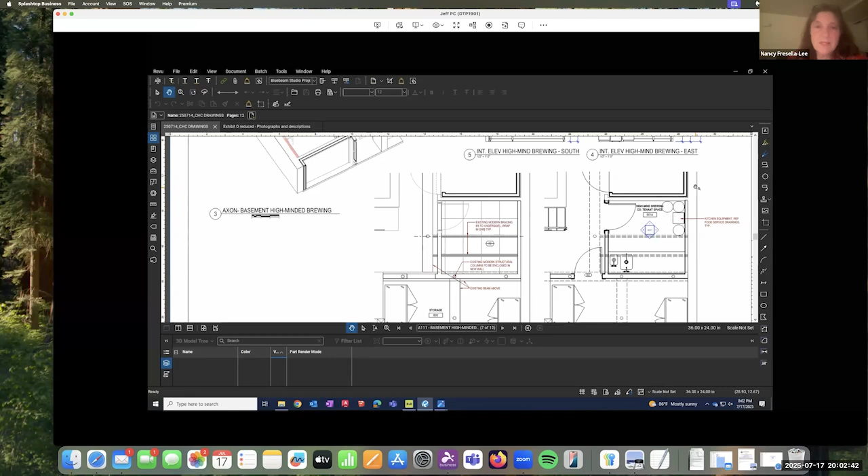I appreciate you telling us that, because I just didn't know that. Thank you. Can I also say that all historic buildings have evolved and become different things over time? This is no different. This has been a bakery, a rooming house, a tavern, all kinds of things.

And I thought, in working on this preservation plan, one of the things we talk about is adaptive reuse, to continue to use these older buildings. And you have been very careful in preserving the exterior and a number of the features that have been identified by the good work of Lynn Spencer.

We should have this as an example in our preservation plan, since we're in the process of writing it up. It's a good example to include in our comments about adaptive reuses.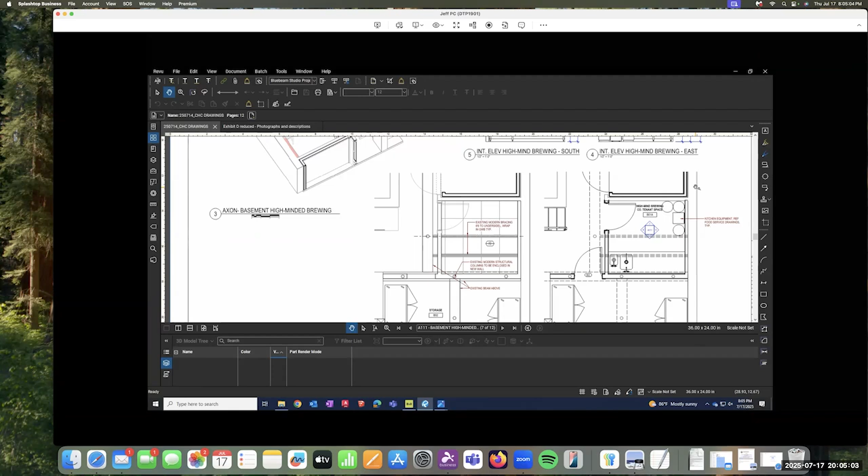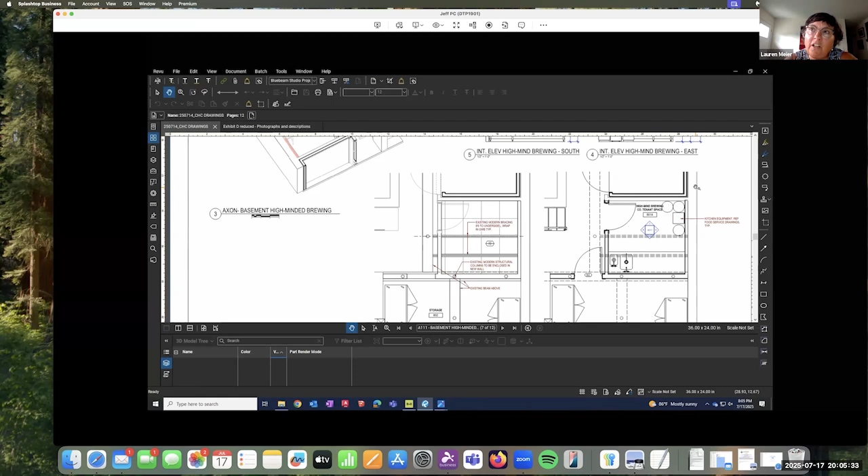Lauren has her hand up, I think. Okay, I'll let Lauren take the lead. I'm always going to be the preservation expert here, I guess. I don't know what the word is, but I would like to have a discussion about the paneling and the new wall, the compatible versus distinguishable issue. I don't see any major issues with the project at all.

That one I think is decorative, so it doesn't really affect function, but I would like to have a discussion about that, maybe on site. That's the one feature I'd like to review. So we're talking refinements, not rewrites. Exactly, just minor relative to the bigger picture.

Does that help you, Jeff? That helps me, that's what I expected. I just had to ask.

I'm a newbie at this, and everything I see here, you guys have done tremendous work just to bring this thing up to modern day standards, to get new uses out of it, and to keep it alive into the future is just absolutely commendable.

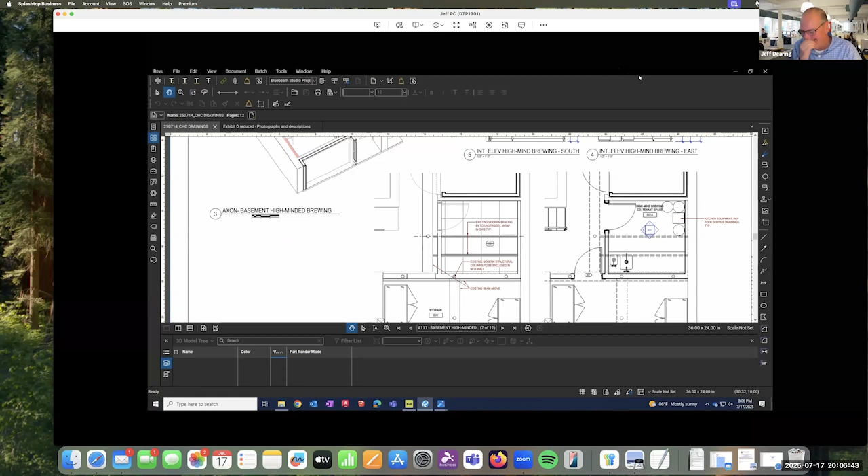The applause goes to Tom Wilson and his vision for this. Oh yes, it takes a village, this is one of the classic experiences. It's gone beyond a team, it's really been a real village.

One of the things that's important, and I've sort of held off on, is we're about a third of the way through in funding. We've made a number of investments, and I've held off on the funding strategy, but I can highlight some of those questions you might have. We want this funded by more private funding than through lots of grants and things, because the sooner we get this moving, the sooner we'll be able to be in operation.

There are a number of people who could easily write the entire check for what we need, but I'm not necessarily asking them for that. We're having conversations with some high net worth individuals about supporting this project. They're very interested in it, but I wanted to hold back until we had some sense from you, this commission, on how you felt about the place, because I didn't want to get ahead of my skis on this. Time is important, but it's better to do it right than to do it fast.

Having your support means a lot, I can't tell you how grateful I am for that. It gives me something to say to people who will ask what the Historic Commission said about this, and we'll highlight that we're still in conversations and discussions. But the statements you've made about support are very heartening and give me lots of confidence to have serious conversations across the table to provide the funding to make this thing become reality.